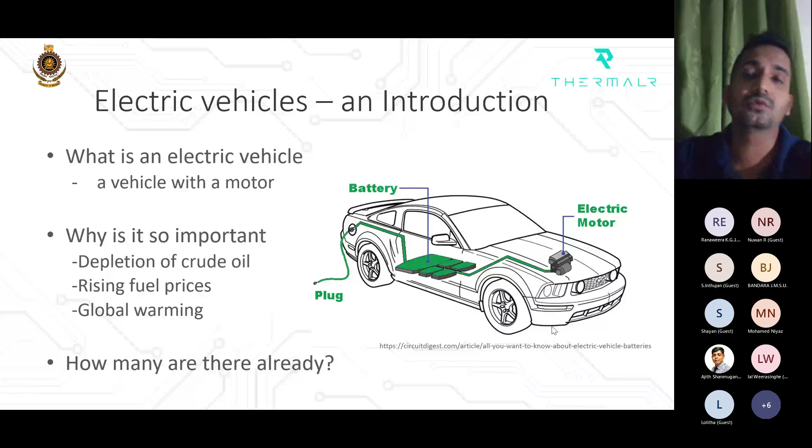One is brake-specific fuel consumption. Brake-specific fuel consumption is basically the amount of fuel we have to burn in an engine under ideal, standard scenarios to generate a kilowatt hour of energy - the petrol or diesel we have to burn to generate one unit of energy, one kilowatt hour.

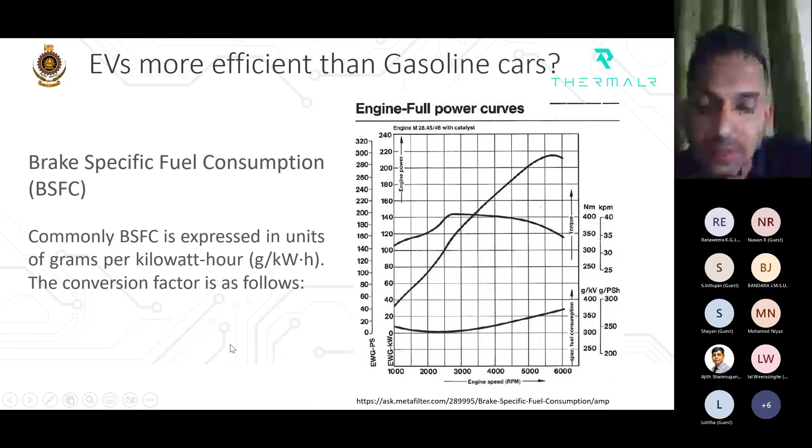The other thing is, particularly for petrol cars, we have throttling, and throttling reduces the overall efficiency. Throttling is like when you breathe - if you obstruct your nose, put your finger over it and try to breathe, you have to put in more effort because your lungs have to do more work to get the air in, since there's an obstruction to your air ducts.

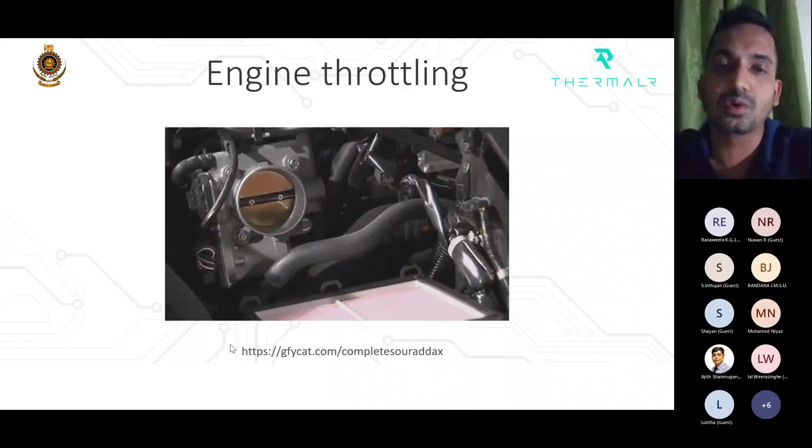Just like that, in a petrol engine, when there's a throttle, if it's closed, there can be no flow - well, a little tiny bit. If the throttle is partly open, there's an obstruction for the airflow, meaning the engine has to do more work to get the air in. Only when the throttle valve is fully open is there no obstruction, and the engine does less work to get the air in.

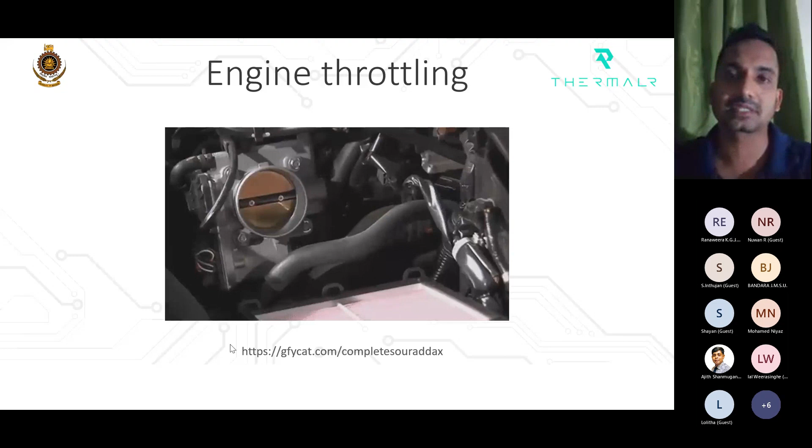But in practical scenarios, when you drive your petrol car, how often do you press the accelerator pedal all the way down for full throttle? You hardly get to do that - you're always accelerating at a quarter or maybe 50% in rare cases. So you always have an obstruction to the airflow, meaning the engine generally has to do additional work just to suck in air against the throttle position.

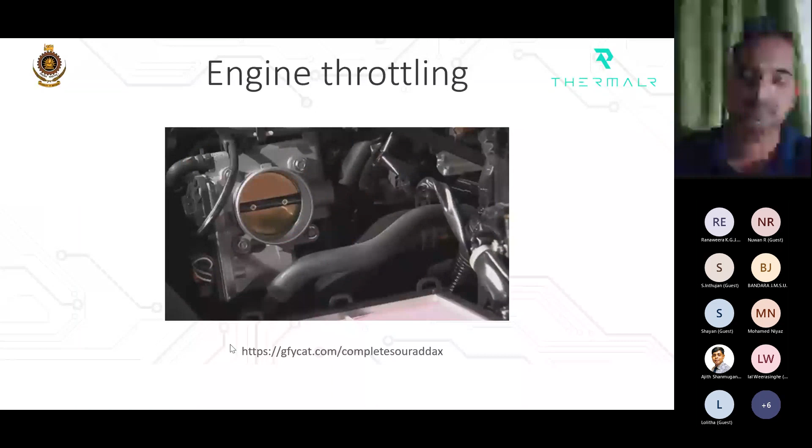On full throttle, as expected, as RPM increases you see a rise in brake horsepower because you get enough air inside the engine, so you can put in more fuel, burn it, and get more power out of it.

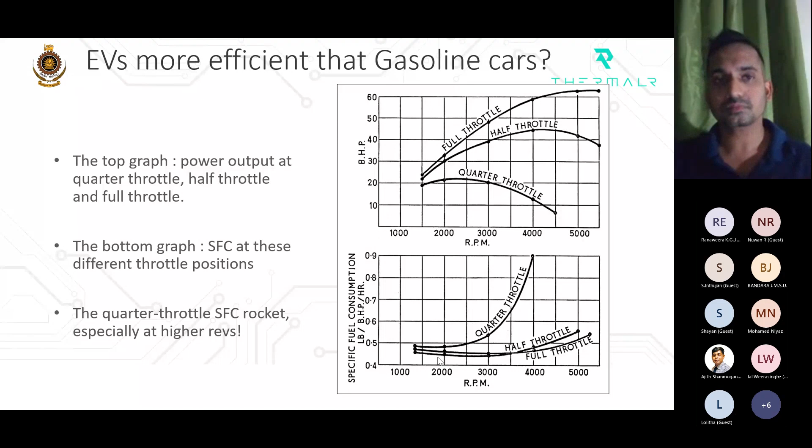So basically, a 25% load scenario would be a driver and a passenger, maybe two passengers. So most of the time when we drive our gasoline cars, it's just the driver driving the car alone. That will be a very low load scenario. Maybe a driver and a passenger will be there sometimes, which will be quite similar to a 25% load scenario.

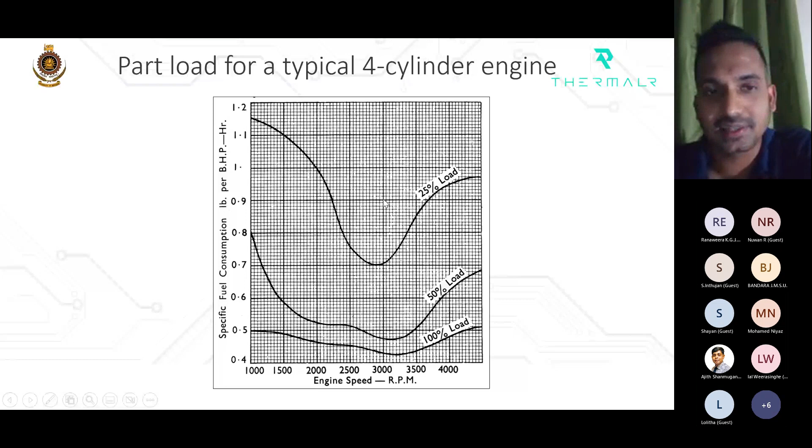So we are not even applying the full load that the engine is capable of carrying. In real life scenarios, we are at somewhere around 25% load, and the throttling is also maybe about quarter throttle. So we are basically not getting the best out of these engines when driving around. That is why petrol engines are said to be 15 to 25% efficient. That 25% is at maximum load, maximum throttle. In an actual real life driving scenario, you'll be operating from 15 to 20%. About 20% is also a rare case for a petrol car.

A diesel car can actually reach about 40% maximum, again at a full load scenario. In diesel engines, you don't have a throttle valve, so there's no obstruction to airflow. It can suck all the air in with natural aspiration, and sometimes you need a bit of boosting with a supercharger or turbocharger for a diesel car. But the throttling effect isn't there in diesels. So if you set a diesel engine to run at full load, it can be far more efficient than a petrol engine, reaching about 40%.

Now that's the engine efficiency for petrol and diesel. If you look at an average motor, its efficiency ranges from 85 to 90%. If you supply electricity to it and calculate how much mechanical work is done, the efficiency comes to about 85 to 90%. It can be more or less depending on the type of motor. So you can see a motor as a propulsion mechanism for a car is far more efficient than a petrol engine.

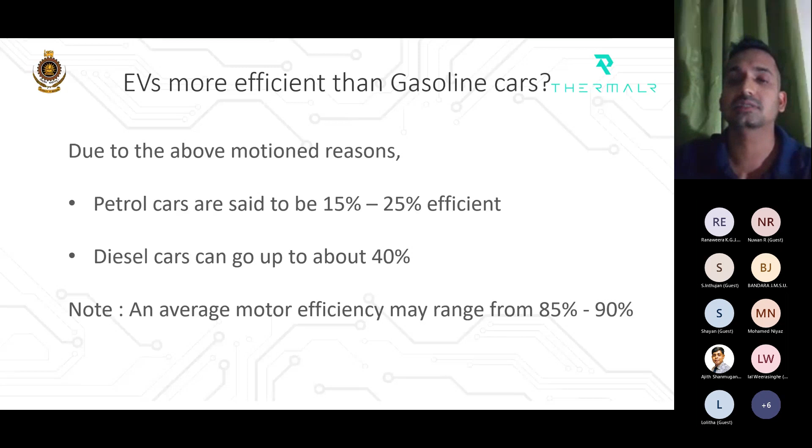But in stationary power plants, even if you generate electricity using a stationary power plant and then supply that to an electric car, the stationary power plant can always operate at its maximum capacity or efficiency because it's stationary. No throttling is needed. You can apply full load to it and start generating electricity, so the efficiency will be far higher. So that is the advantage of running a diesel generator to create electricity and running an electric car with it, because the overall efficiency will still be higher than simply burning diesel in an automobile application or engine.

And the Sri Lankan grid emission factor comes to 0.6925 kilograms CO2 equivalent per kilowatt hour. Basically, to generate a kilowatt hour of energy, or 1 CEB unit of electricity, the Sri Lankan electricity generation scenario will produce 0.69 carbon dioxide equivalent kilograms. That is the Sri Lankan grid emission factor. So all these grid emission factors vary from country to country based on their energy sources that are contributing to generate this grid electricity.

Now, one thing we can do based on this data to have a good understanding - it's still a gray area, right? We don't know how much energy is actually being used to generate a kilowatt hour when an electric vehicle is driven, and also how much actual energy and carbon dioxide is emitted in the whole process of creating a kilogram of petrol or diesel to be burned in an automobile engine. Not just burning in the engine, but there's a process associated with refining crude oil and extracting crude oil. So there's a whole process involved in bringing a kilogram of fuel to your vehicle, and also a process associated with generating a kilowatt hour of energy from the grid. So by assessing the whole scenario, you get an idea about how efficient or effective your electric vehicle is in addressing carbon dioxide emission factors or energy efficiency.

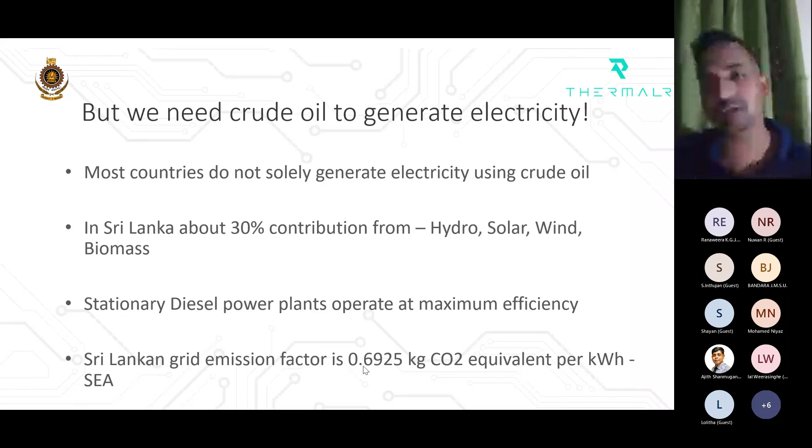Now, I have done an LCA, or life cycle analysis, for some of the products that we do at ThermalR Industries. We have the electric motorbike, the bicycle, and the electric three-wheel conversion. So I took this sample life cycle analysis calculation that I did for electric three-wheelers, where I compared the environmental impact of electric three-wheelers versus the conventional gasoline three-wheelers.

Now, first of all, we have to identify the boundary and the scope, because if you look at the whole process of extracting crude oil to the point where it's refined and then burned in the three-wheeler - that's a huge process that will consume a lot of time and resources to figure out all the values involved with it. So to reduce the effort going into that and to have a justifiable result, we have to identify a scope.

So in this process, I have identified the scope from refining the petroleum, to transportation of petroleum to the filling stations, to burning them in the gasoline tuk-tuk. That is the scope I have identified for the petroleum tuk-tuk.

And then for the electric tuk-tuk, we have this boundary. Of course, the boundary comes from the production of electricity, where the scope starts from. But before that, we have crude oil extraction, because our grid electricity has diesel power generation, diesel electricity, and coal in it - so that is one input going into production, and the other is coal. And then, of course, we have renewable energy sources going into production of electricity in Sri Lanka. But for the scope, we have started from the production to generation of electricity, to the end point, which is the consumption of electricity in the electric three-wheeler.

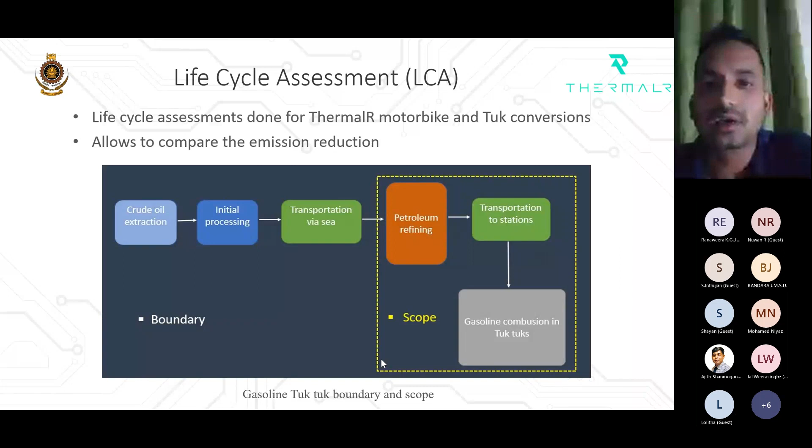And using those factors, we can basically do a small calculation and figure out what are the emissions involved with these two scenarios, driving a petrol three-wheeler versus an electric three-wheeler.

This is the calculation, so you don't have to read through all of it, just focus on the last two sentences. The CO2 emissions reduction per month per unit converted is 176 kilograms. Percentage reduction of CO2 emissions by converting gasoline three-wheelers to electric is 54%. So there's about 54% carbon dioxide emission reduced per three-wheeler converted, and in kilograms it's about 176 per month per tuk-tuk.

And then the cost saving, of course, the biggest factor. If you do the same sort of calculation to see what are the cost benefits of driving an electric three-wheeler versus a petrol three-wheeler: if a three-wheel driver does about 100 kilometers per day and taking the cost per liter as 410, when you do the calculation, the cost savings per month comes to about 42,000 rupees. That's a huge amount for a three-wheel driver. This cost saving as a percentage is 86%. So you can obviously see there's a large amount of money that can be saved by driving an electric vehicle.

For this, certain assumptions were made. The electricity cost per kilowatt hour is taken as 32 rupees, which is quite okay I think. And then, of course, the cost per petrol liter is 410.

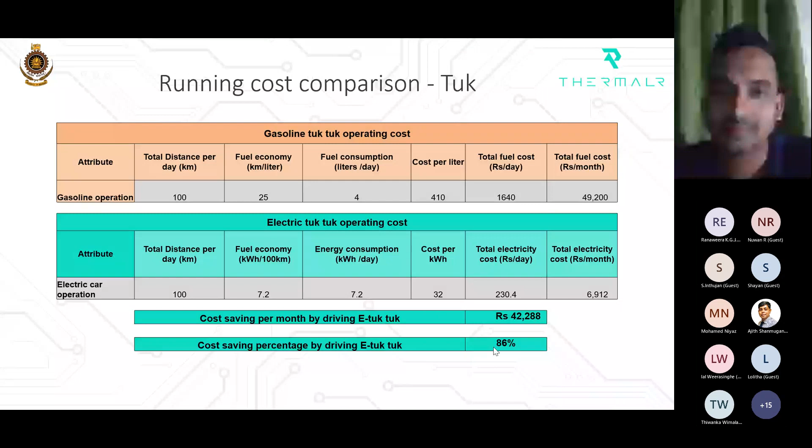We have done the same thing for a motorbike, so don't worry about the calculations, just look at the last two sentences. If you do the same LCA for a motorbike, the CO2 emission reduction per month is 61 kilograms, and as a percentage it is 54%. So there can be a large amount of CO2 reduction if you do a conversion from a three-wheeler to electric, or a gasoline motorbike to an electric motorbike.

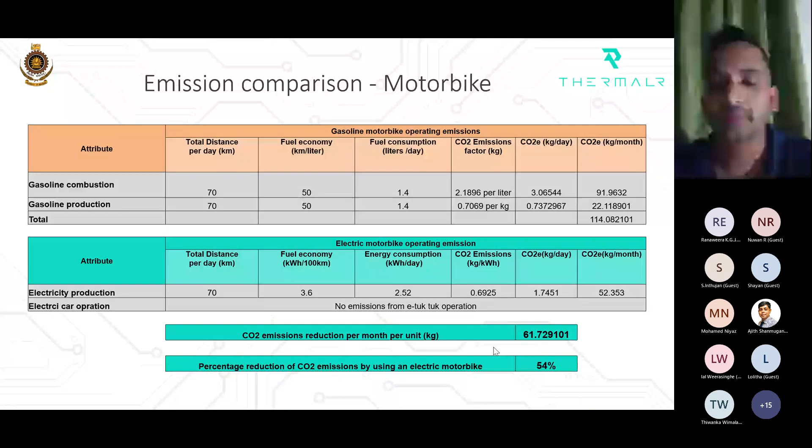These calculations were specifically done for ThermalR products. This is the ThermalR electric motorbike. It's called the Paragreen. This is a prototype that we have done, and we are planning on manufacturing a number of units by the end of this year.

And we have this electric bicycle. The motorbike is basically made in Sri Lanka. We developed the chassis, the body, electronics, most of the components. We have about 60% local value addition. The bicycle is basically converted into electric in Sri Lanka.

And the three-wheeler, this is the electric three-wheeler that we build. Basically, this is the conventional three-wheeler converted into electric. We take the engine and the surrounding systems out, and we install a motor, battery, coupling mechanisms, mounting brackets, motor controllers, the digital display, etc. And basically it becomes a brand new powertrain fixed to an old three-wheeler.

But the driving pleasure is there. The electric vehicle driving feel is there, just like when you're driving a Nissan Leaf. So basically these calculations are the practical data we take from the products that we already have, and others from the literature, for electric motorbikes.

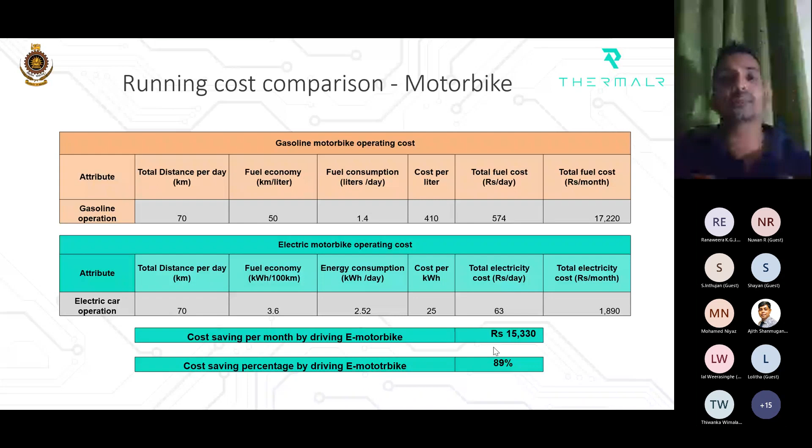From these values, it's quite obvious investing in electric vehicles would be the best decision you will make in terms of personal savings, because I personally saved a lot of money. On some days, when we had these long queues, I left my car and rode my electric bicycle to work. My office is also near University of Moratuwa in Katubedda, and from here to there and back, the round trip from my home to work and back is about 25 kilometers. And I just do a single charge for the bicycle.

I go there and come back with a single charge, covering that 25 kilometers, and there's still a bit more juice left in the battery. And that only cost me about 0.36 CEB units. Quite small. And if I do the calculation for the whole month, I'll be spending somewhere between 500 to 1,000 rupees to travel to work and back on my electric bicycle.

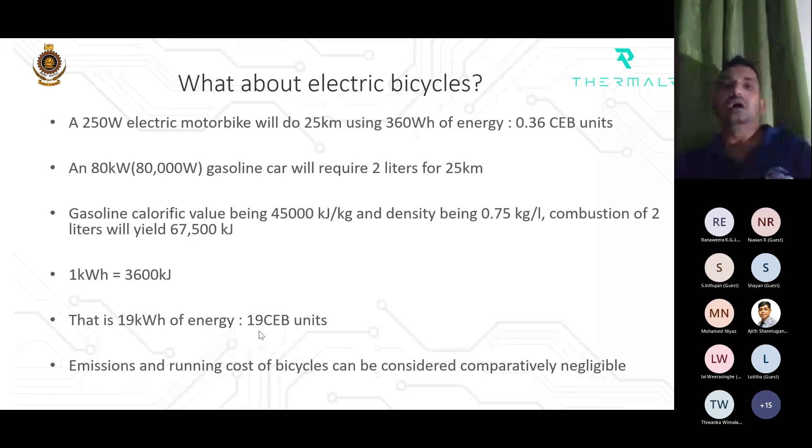Now, how does this all add up to being a solution for the fuel crisis? Now you get an idea how much money we can save in terms of personal savings, but how much money can the government or economy save by switching our fleet into electric vehicles?

For this analysis, I've done a small calculation, taking a round trip of a petrol car going 50 kilometers, and an electric bicycle doing the same 50 kilometer round trip. I've averaged the fuel usage to be 4.3 liters to do 50 kilometers, and for the bike, 360 watt hours for 25 kilometers, so 720 watt hours to do 50 kilometers. So petrol car uses 4.3 liters, electric bicycle uses 720 watt hours.

If you do the calculation, the assumptions are as mentioned: cost per liter of petrol for the government—just to generate a liter of petrol in the refineries and get it to market, the government spends 400 rupees. And to produce 1 kilowatt hour of energy, the CEB, the electricity board, requires 20 rupees. Those are the assumptions I've made, and the exchange rate is 360 LKR per USD.

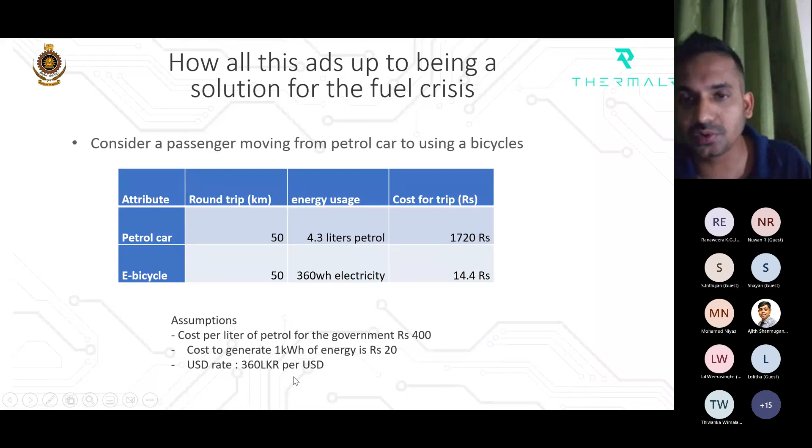Taking those into account, for a round trip of 50 kilometers per day, the cost for the government for the petrol involved is 1,720, and for the electricity involved, 14.4. If you do the calculation for 100,000 units—imagine 100,000 cars—obviously we have more than that; I think the number comes to about 300 to 500,000 cars.

The cost for the government in rupees is this. And if you do the same calculation in USD for an entire year, the total expense comes to about 174 million US dollars for petrol. For the electricity produced, the cost for the government comes to about 1.46 million US dollars.

So if 100,000 people using cars switch to using bicycles—these automobile users all of a sudden decide to buy an electric bicycle and do their daily traveling—the government will roughly save about 173 million US dollars annually.

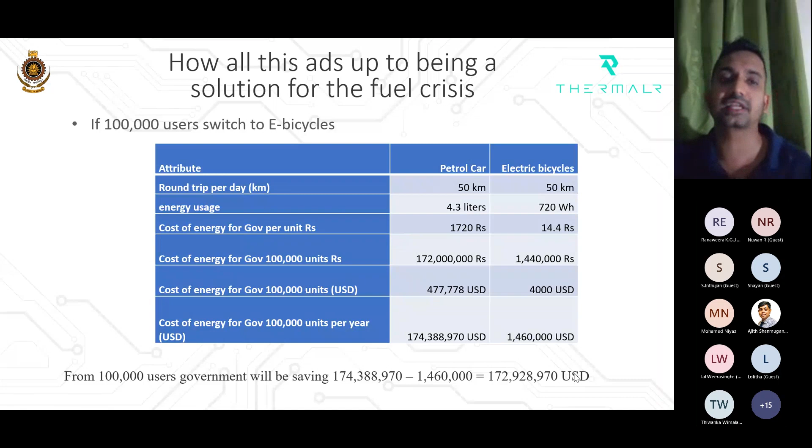I've done the same calculation for an electric motorbike and an electric three-wheel conversion. For 100,000 bicycles, as shown, the government saves about 173 million US dollars from fuel imports. If a gasoline motorbike user switches to electric, again from fuel imports, you can save about 140 million dollars. And if you convert three-wheelers from gasoline to electric tuk-tuk, there will again be a saving, for 100,000 units.

Now, we have about 1.1 million three-wheelers on the road, and roughly around 500,000 cars. The largest fleet in Sri Lanka is motorbikes—we have over 5 million motorbikes on the roads. This calculation is for 100,000 motorbikes; now imagine if half the fleet converts to electric. With these amounts of savings from fuel imports, the entire annual savings to the government will be in billions of dollars—about 10 billion for sure.

Calculations can be easily done after this. But just to give you an idea, if we convert even a quarter of the fleet to electric vehicles, once we promote and reach that point where at least a quarter of the vehicles are electric, the savings on fuel import for the government will be in US dollar billions. That is how the introduction of electric vehicles can actually tackle the crisis we are facing right now.

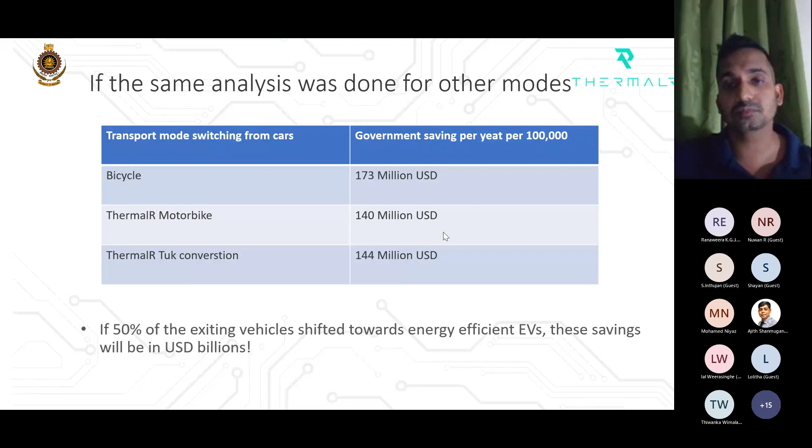So one, it will eventually save money for the government. Two, the living standards of the people will increase because there will be more savings for the general consumer. And three, it will promote local industry. We have a number of players manufacturing electric vehicles, and that will encourage them. When the market develops for electric vehicles, the demand is there, and more players will come into the market. So basically, we have huge potential moving towards electric vehicles, and a large portion of it will directly contribute to getting Sri Lanka off this economic crisis.

That's it for my presentation. Thank you. And now we can move on to the Q&A session.